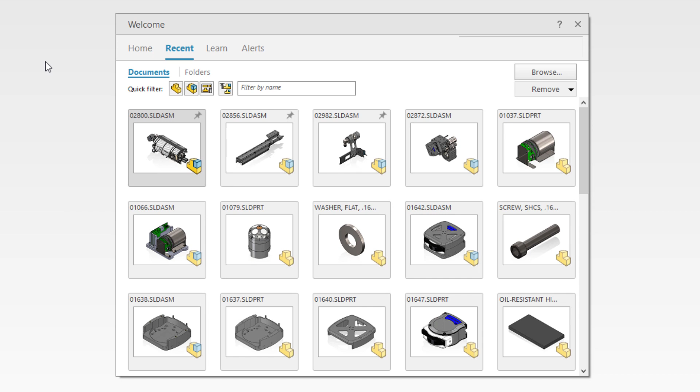You demand the best performing tools so you can work as efficiently as possible. SOLIDWORKS 2021 delivers multiple new enhancements to access your data faster and work more efficiently. Open times for both resolved and lightweight assemblies have been improved in SOLIDWORKS 2021.

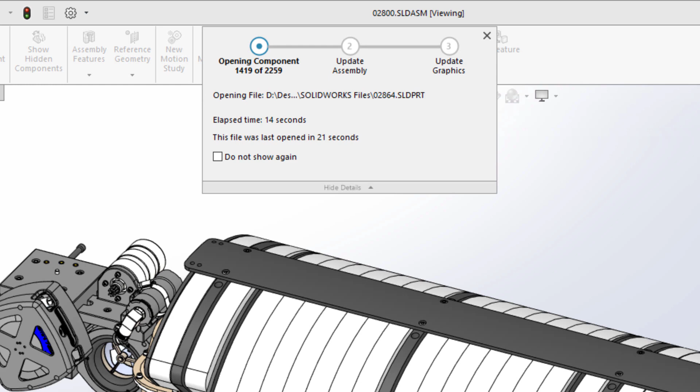This 2259 component assembly opens in only 14 seconds, making getting into your designs faster than ever. The larger the assembly, the greater the gains you will see while opening them in lightweight mode.

To improve working with lightweight components, there is now also a more streamlined approach to accessing their assembly and feature information. Simply expanding a component from the Feature Manager tree will now dynamically load those components on demand, giving you access to the fully resolved subassembly or part.

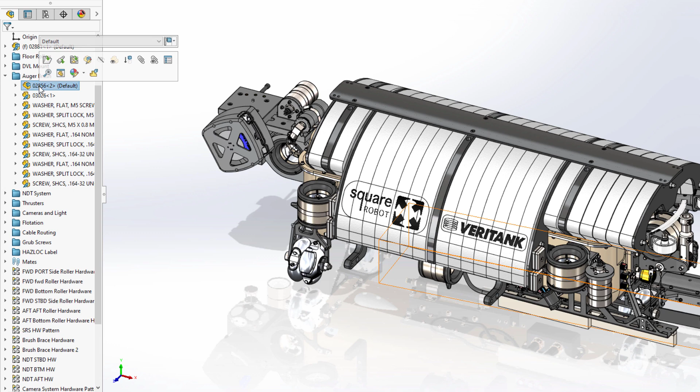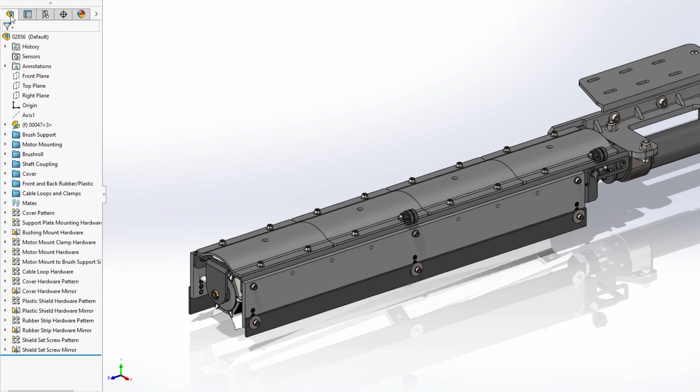This prevents unnecessary loading of large assemblies, but also allows you to quickly access and resolve the components you're working on as needed. Working with configurations in SOLIDWORKS 2021 is now also faster. Both switching between and creating new configurations are now significantly faster for assemblies.

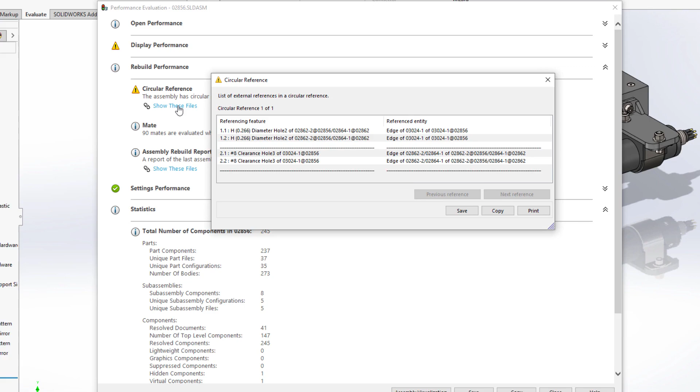The performance evaluation tool within SOLIDWORKS has always been an invaluable resource to give insight into areas of a design that may cause performance degradation. New for SOLIDWORKS 2021 is the analysis and reporting of circular references within an assembly. In this case, two holes on two separate parts have been found to reference one another.

You can use this information to further investigate the design and determine how they're referencing one another to fix these issues. In this scenario, one of the components listed in the report contains a hole wizard feature, where its location sketch has center points that are referencing the edges of a hole in the adjacent part to locate them concentrically. This is a common top-down design practice to ensure that holes always remain aligned to one another.

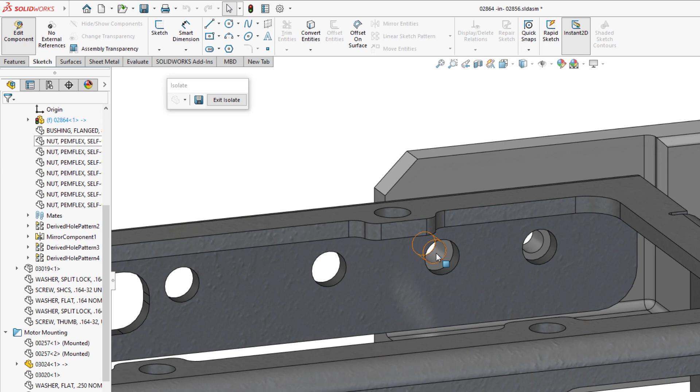However, on investigation of the second component's feature, also a hole wizard, it appears that the center points within this sketch are likewise referencing the edges of the previously interrogated holes. This creates a circumstance where both features are trying to define the location of each other, or a circular reference.

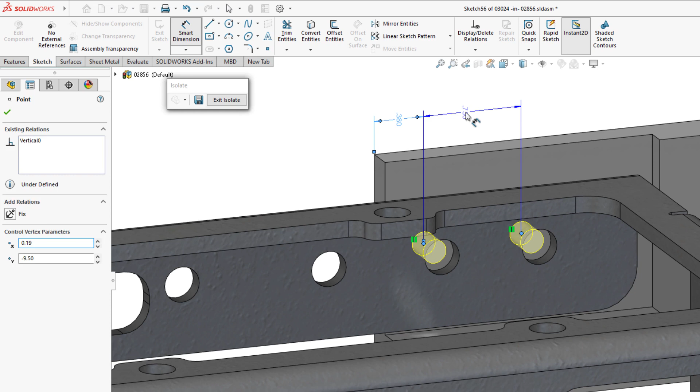To fix this scenario, the best course of action would be to remove the external references and redefine the location of the hole centers in one of the sketches, in this case dimensionally to the part they reside within. Once the changes have been made, a quick rebuild removes any warnings from the assembly.

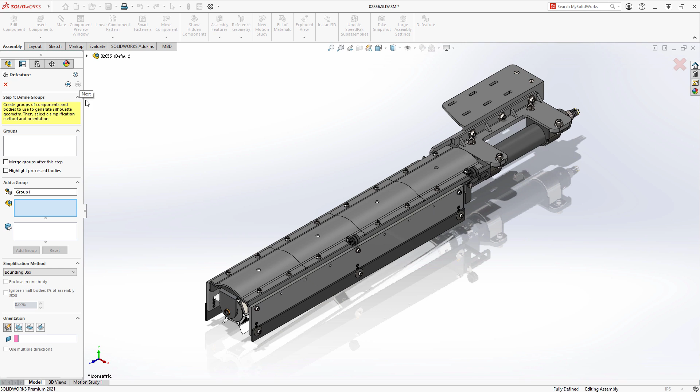Finally, you can use Silhouette Defeature, introduced in SOLIDWORKS 2019, on an assembly to create a simplified representation of it, or to protect proprietary information. Silhouette Defeature provides an intuitive step-by-step workflow to define this simplified version using a variety of geometry simplification tools.

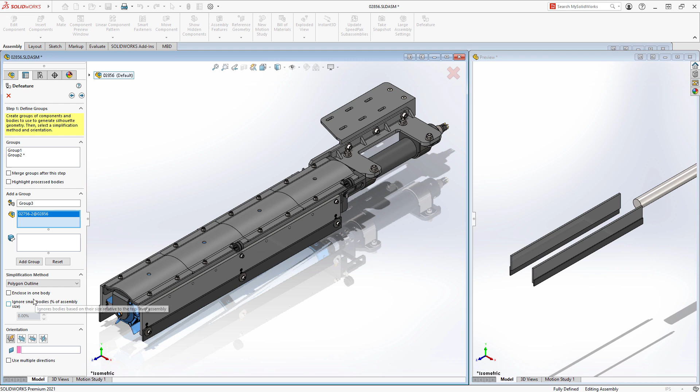While you are selecting the components, bodies, or subassemblies you want to simplify, you will always have a side-by-side view to show what your finished representation will look like. This ensures that you can capture the correct amount of detail. The methods you can use to simplify your geometry range from something as simple as a bounding box or cylindrical representation of the components, or something a little more complex, like the polygon or tight fit methods, which add a little bit more detail to the final results.

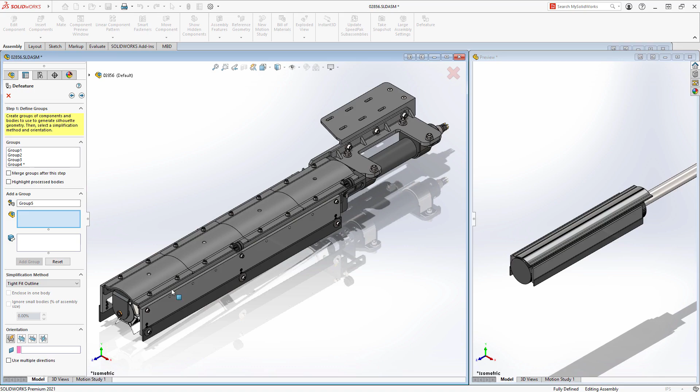Perhaps some of the components in your subassembly are critical to show in a top-level design, even within a simplified representation. For those instances, you can choose the copy geometry method to capture all of the detail of those components, bodies, or subassemblies.

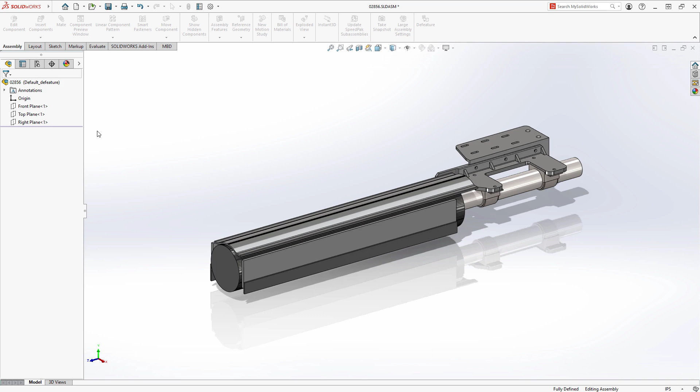What's new for Silhouette Defeature in SOLIDWORKS 2021 is the ability to save this simplified representation as a configuration within the same assembly from which it was created. This eliminates the need to manage a separate file that contains the simplified model. You may still want to use those other methods when using Silhouette Defeature to remove proprietary information from a design to share outside of your organization as a separate disconnected file.

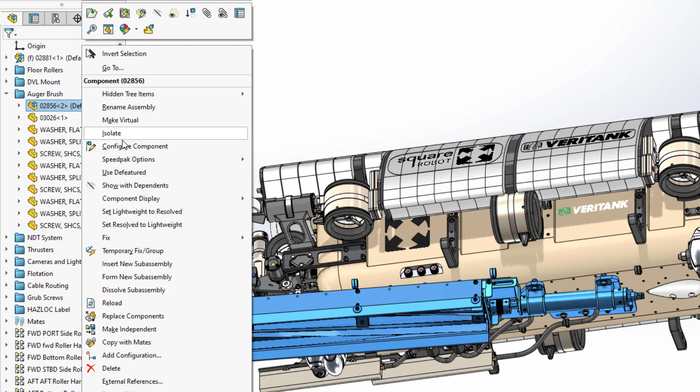However, when using defeatured models within higher level assemblies, it is now as simple as right-clicking on the component and choosing to use the defeatured version. Defeatured assemblies as configurations provide a way to both simplify complex assemblies visually and also add a performance boost in cases where the detail of the individual components isn't necessary.

With these new performance-oriented features in SOLIDWORKS 2021, you will be able to work faster and more efficiently with larger and more complex designs.